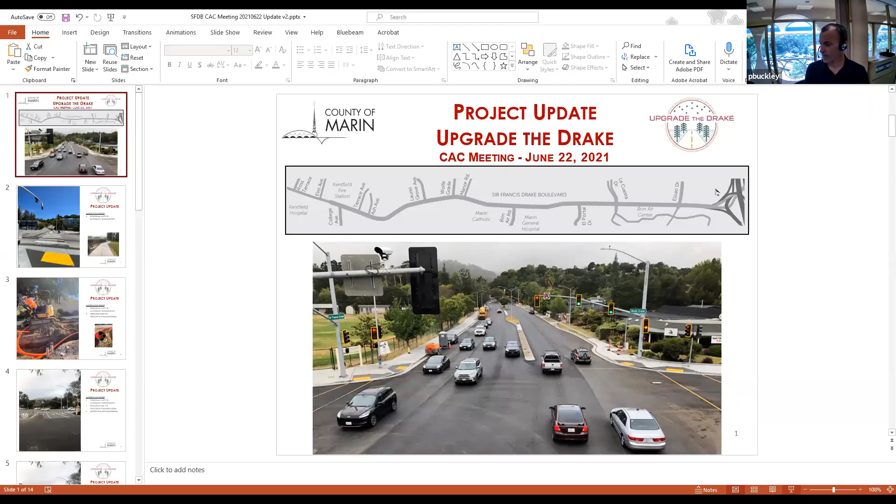Okay, thank you, Katie. As Katie said, I am just going to talk real briefly and update you on the progress, and talk a little bit about where we're at before we move into the lights.

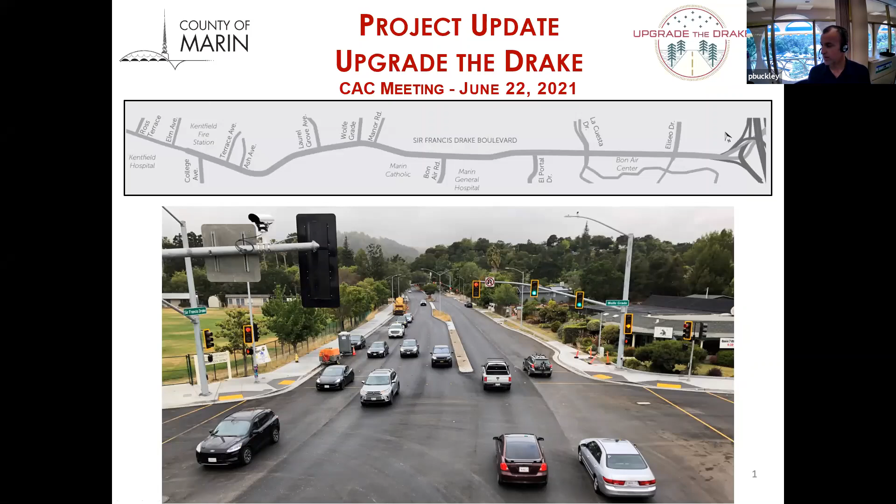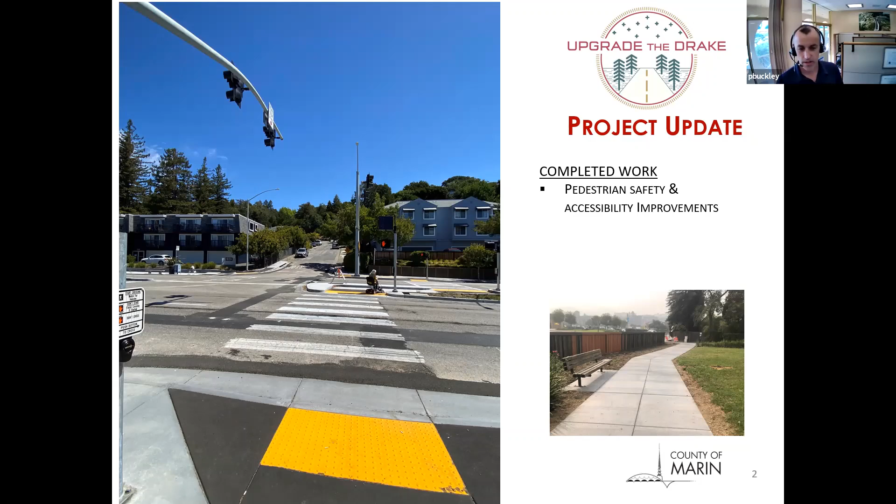Thank you for your patience with the noise, the paving, and all the disruptions this project has caused for many of you. We are getting very close to being done, so it's exciting, and I'm sure there's a sense of relief as well. Just to update on what's been completed: all of the pedestrian safety and accessibility improvements have been completed. This is the Ash Avenue Hawk signal here in this photograph.

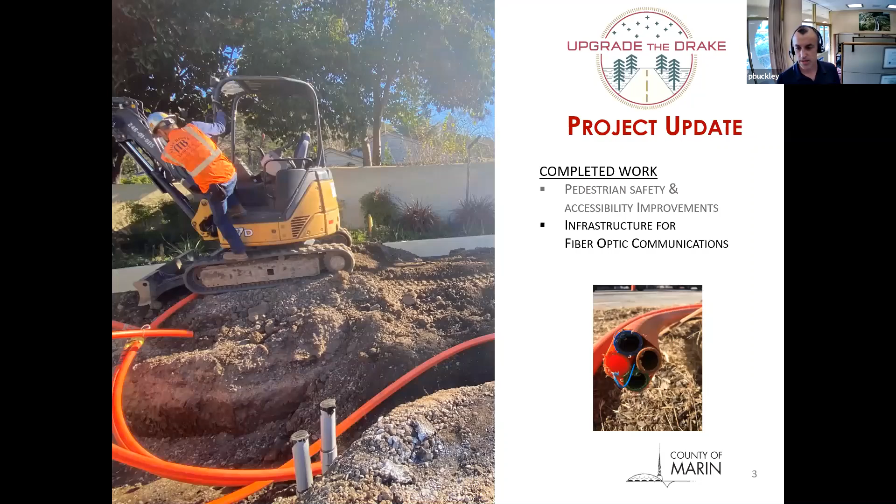All the infrastructure for fiber optic communications and the signal interconnect is all in place. The intersections have been reconfigured and improvements have been made at the intersections. At this intersection here, the pork chop islands have been removed.

Just today, we had a number of complaints about this intersection and how it was changed, with this middle lane configuration and the timing and phasing there. We went back to our designers at La Cuesta, and they approved us making the change to put the lane configuration with this middle lane being a combination through left turn lane. So we've re-implemented that today.

So all 8 signalized intersections, the pedestrian and safety improvements have been completed. We are still making a lot of changes with the timing and optimization. Just yesterday at Wolfe Grade, there was some timing adjustment. If you've driven along the corridor and come to a stop...

Philip, can you unmute yourself, please? Sorry, I messed up. Oh, I muted myself somehow. No, I didn't. Go ahead.

Okay, so we're still making timing and coordination improvements, and that's going to be an ongoing process as we test the system. The team will be making changes there. So appreciate your patience with how long it's taken to get our coordination into the system.

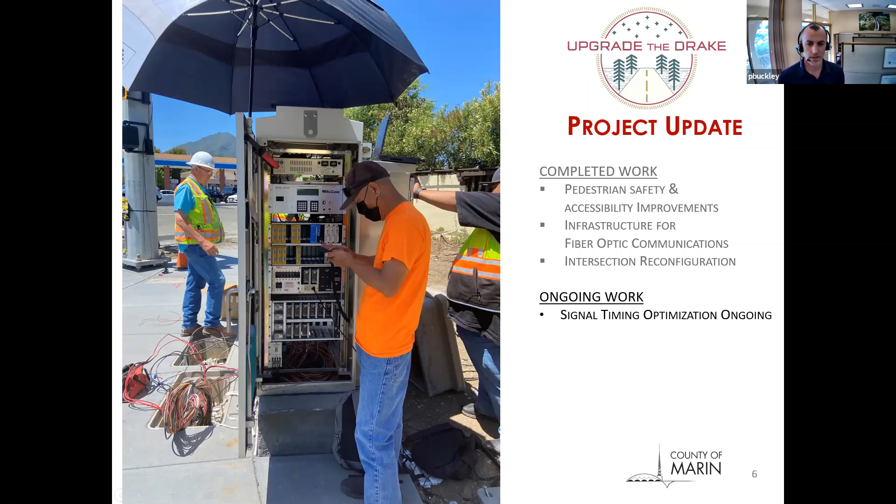So with the rest of the ongoing work that we're working on, we're finishing up some water line at Eliseo. I do want to emphasize how important the work is that we have completed with the water line. Throughout the course of the project, we've encountered a number of times when the pipeline, which was 70 years old in Sir Francis Drake, has had leaks, and we've had emergency repairs with MMWD. We're actually fixing some 70-year-old pipeline right now in Eliseo.

The good news is that the water line work and the night work looks to be completed at the end of next week.

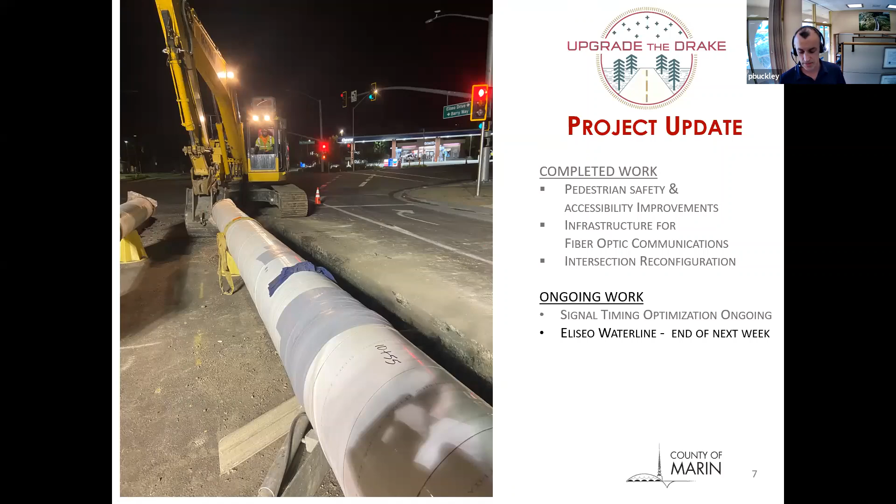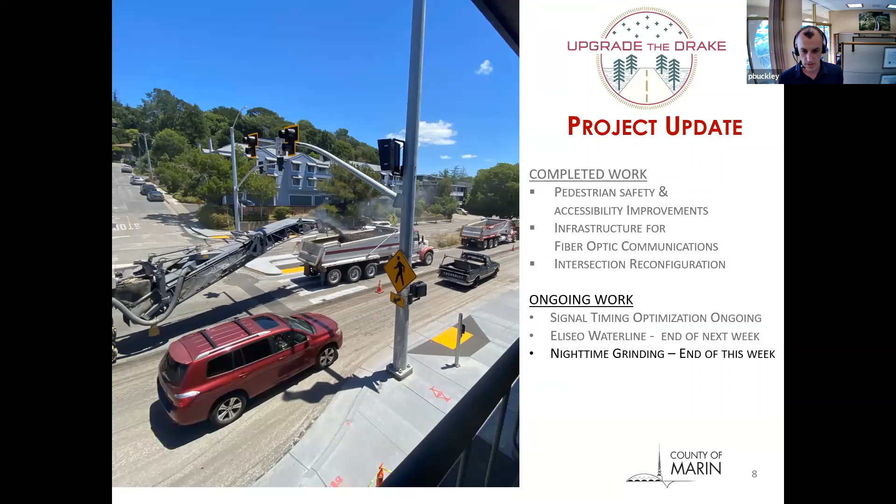The nighttime grinding is ending this week. The major grinding operation for our paving is ending, with tonight being the last night of that work. That's good news as far as the noise and equipment associated with the heavy grinding. We're working closer towards Highway 101 and the freeway, and there will be some closures tonight and next Wednesday for the on-ramps at the freeway.

So if you're getting on the freeway in the evening trying to head north or south, your route will be different, and it's definitely an inconvenience. We appreciate your patience, but we're getting very close, and next week should be the end of the major paving operations, with a final lift going on next week.

The week after next, there will be some manholes raised, some minor work. It will go quickly, but there will be some more night work after next week. The major equipment and major paving operations will be concluded at the end of next week.

I did want to talk a little bit before we get into the lights and turn this over. There have been comments about why we need more lights since there are fewer people driving at night, and why we need more lighting in the corridor.

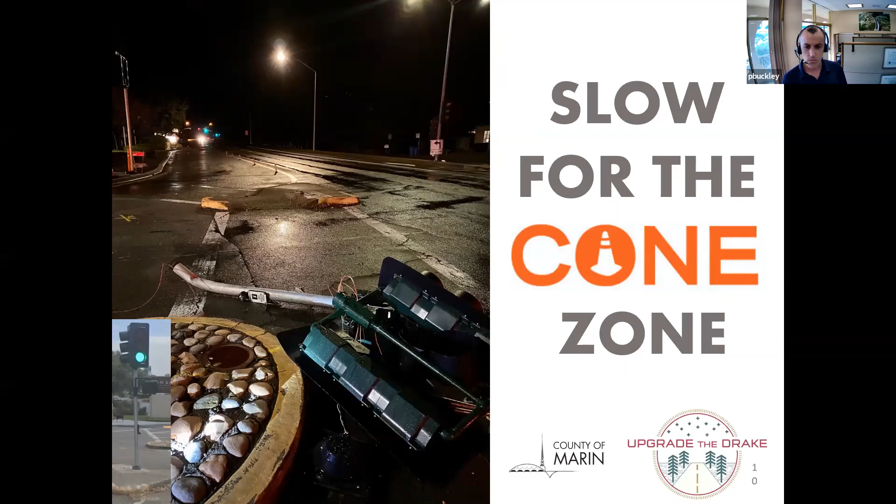Just to wrap up, we'll be finishing the majority of the paving next week, coming in with pavement striping, and then we're going to be talking about the street lighting tonight. I'm going to turn it over to Jeff and Ashley and their team, and then after street lighting we will be landscaping and taking care of the weeds, which have been a nuisance.

The landscaping work is being delayed, not just because of the drought. We are delaying the major planting within the project because of the drought, but we are looking to do some irrigation work at the completion of the street lighting. We need to make decisions about the street lighting and get it finalized and implemented before we move ahead with the landscaping.

One final topic is the traffic signal poles. What's pictured here are traffic signal poles, different from what Jeff and Ashley are going to talk about, which is the street light poles. These traffic signal poles were installed, and we got a lot of complaints and comments about their size and mass. They're a lot bigger than what we're accustomed to seeing.

It really is the new standard to have these larger poles. The standards have been updated, and as the county we're subject to using the latest design standards, and as a result we have larger poles.

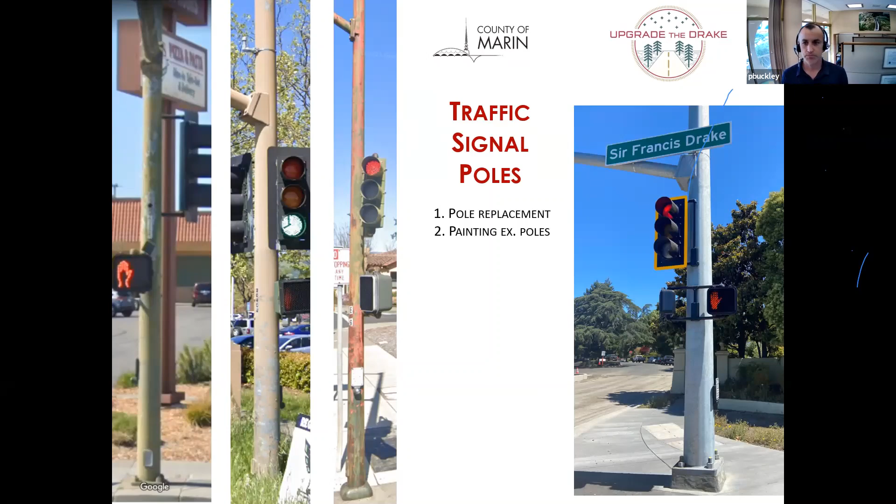With that, I'd like to turn it over to Jeff Rubendahl to talk about lighting. I'll stop sharing my screen here.

Thanks, Philip. Thanks everyone for allowing us to come in front of you today. We've been hard at work for the last few months, working with Philip and his team to come up with ideas and options to address concerns raised since the streetlight poles were installed and turned on. We're going to go through quite a bit of content, so we'll try to keep it comfortably paced and informative, but not dwell on it too much, so we have time for discussion.

We've broken it up into two sections. I'm going to turn it over to Ashley again to go through it to start, but we've broken it into two sections. The first is some basic lighting terminology, so that as we talk about what we're doing and what we see as opportunities, we can give you a sense of the lighting elements we're looking to modify as part of these improvements. Then we'll pivot to walk through the corridor from west to east and talk through options to address overlighting, light spilling into properties, and keeping light where it needs to be for safety reasons. So with that, I'll turn it over to Ashley.

But before I do, just a quick introduction. Fehr and Peers is helping the county with this project. We're a transportation consulting firm that specializes in transportation projects, including roadway safety lighting. Ashley, our project analyst, is one of our visual communications experts here in the Bay Area. I lead our engineering practice, and I'm also a San Rafael resident—I travel this corridor all the time, so I'm very familiar with the before, the middle, and hopefully the future of it. With that, I'll turn it over to you, Ashley.

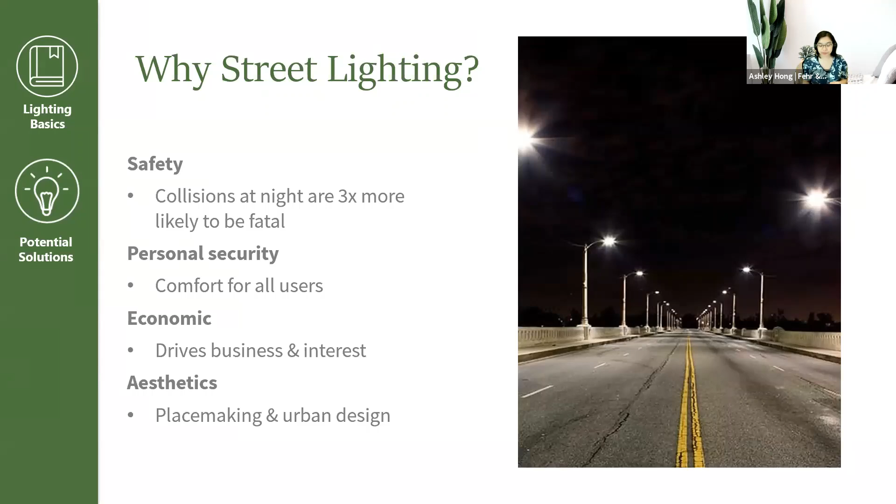With that in mind, I want to go through a couple of lighting basics, explaining a few terms to help you understand how we explain the proposed solutions. We'll use a lot of these terms later when we share our solutions, so I want to give everyone the chance to see the different elements that go into lighting analysis.

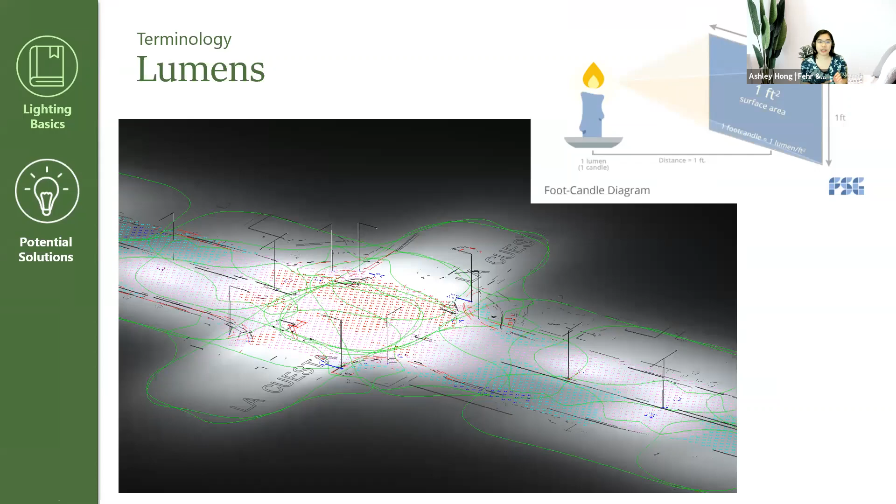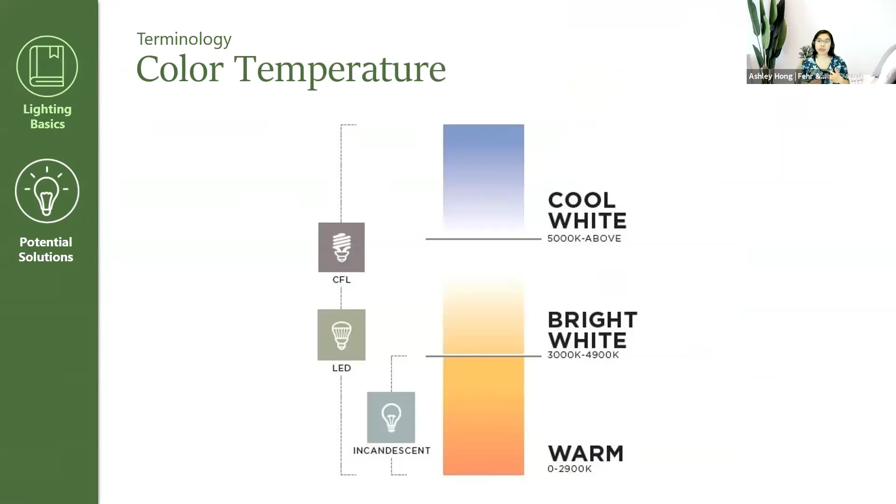The first terminology I want to introduce is lumens, which is how bright a particular light is. The unit of measurement is foot candles—fun fact, it's actually measured by how much a single candle lights one square foot of surface area. Color temperature is essentially how cool or warm the light looks and feels. Distribution is how the light is cast—essentially the shape of the light onto any surface.

Light pollution or light trespass is essentially any light that is going outside of what we want to be lit, kind of light that goes beyond the necessary things being lit.

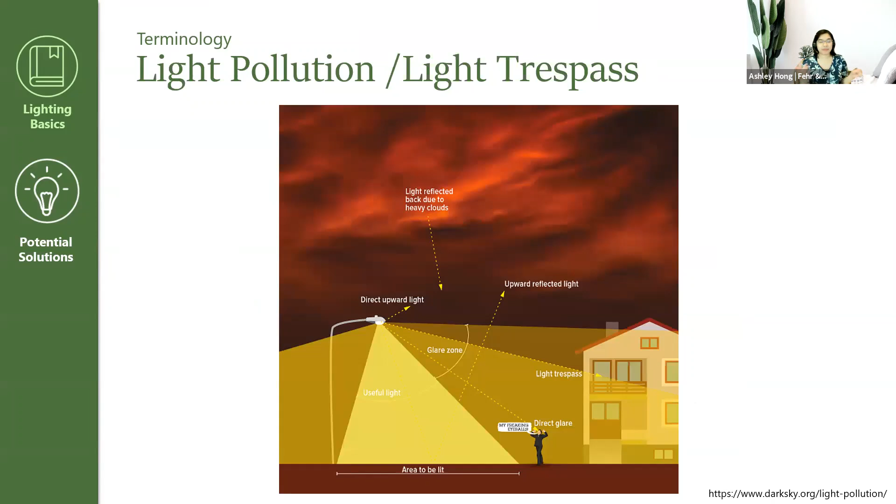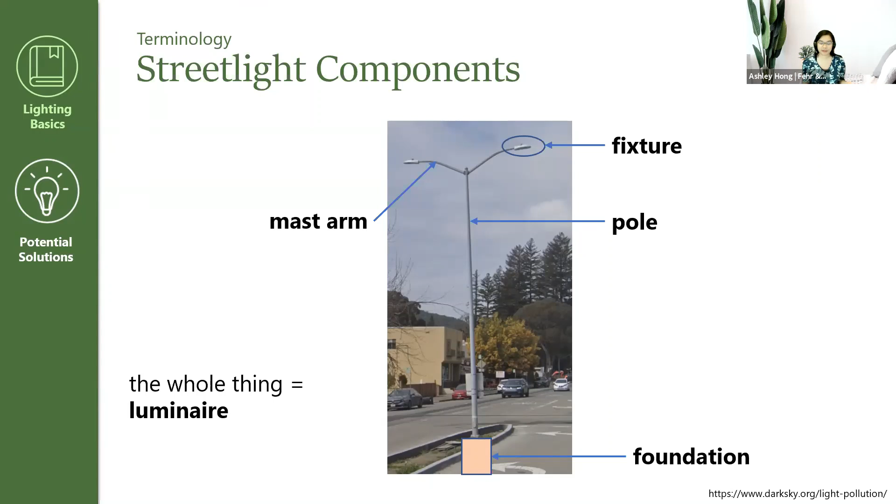Mounting height, going a little bit deeper into the nuances of this luminaire. The mounting height determines how tall the light is and where the light is casting. So lower mounting height is typically used for pedestrian areas such as sidewalks, plazas, parks. And a higher mounting height is typically used to light the roadway, to light the street itself and where vehicles are traveling.

Keeping all of that in mind, another thing we look at, and another piece that we can control and change, is the mast arm length. Essentially, the piece of metal that is attached to the long pole and attaches the fixture. That's something that we can control and change. So for example, if we shorten a mast arm from 12 feet to 6 feet, that's 6 feet less of metal up in the air. And keeping that in mind, the blue line shown on the screen is essentially understanding that where the light starts to be emitted from may be different from the height of the pole itself, depending on the design. So these are all different things we can take into consideration when designing streetlights.

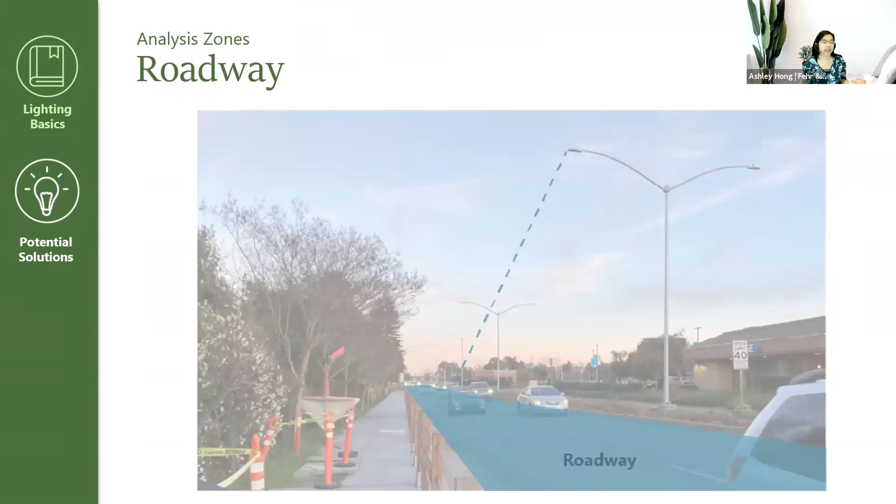So in order to analyze appropriate light levels, we isolate different zones. The first being the roadway, which has to be a certain brightness in order to allow moving vehicles to essentially see any conflicts, so we look at that in isolation. Then we look at sidewalks and paths separate from the roadway, and that needs to be lit enough for pedestrians to feel safe walking, but doesn't necessarily need to be as bright as the roadway.

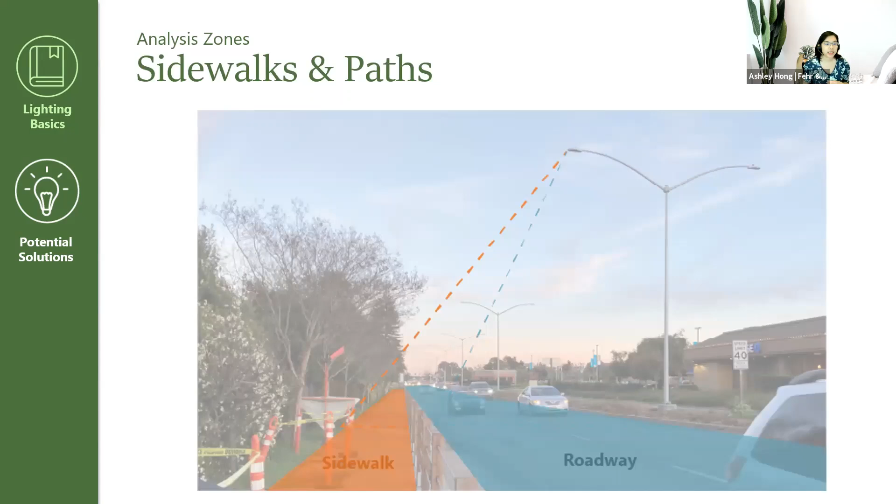Spillover is then what we look at. It's the light trespass beyond the roadway and the sidewalk, and we try to reduce this as much as possible. Finally, we look at intersections separately, which typically needs to be 2 times as bright as adjacent roadways due to the conflicts that can be expected in this area, such as pedestrians crossing and cars turning.

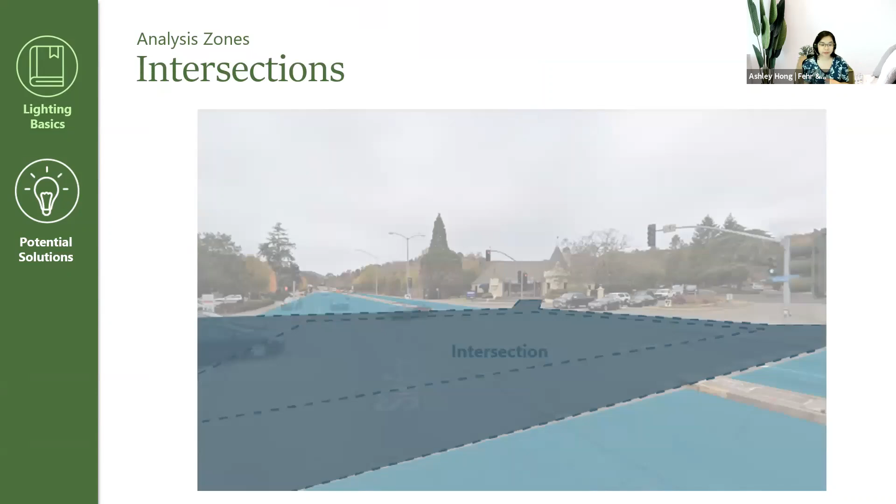Next, just want to get into some metrics and the engineering numbers behind everything we're looking at. This really guides our design and is considered best practice. So first, roadway classification. This is what is the function of the road, where does it go, how many vehicles use it on an average day.

Sir Francis Drake is a major roadway because of the average daily traffic and because it connects through multiple neighborhoods. And while we recognize that traffic on Sir Francis Drake is lower at night, a multitude of conditions still determines the need for certain levels of light, such as overcast and rainy days that can make the road appear darker even during the middle of the day.

So we also look at pedestrian conflict area, or essentially how many pedestrians can we be expecting on this road. And Sir Francis Drake is typically a low pedestrian zone. There's just not that many people walking around.

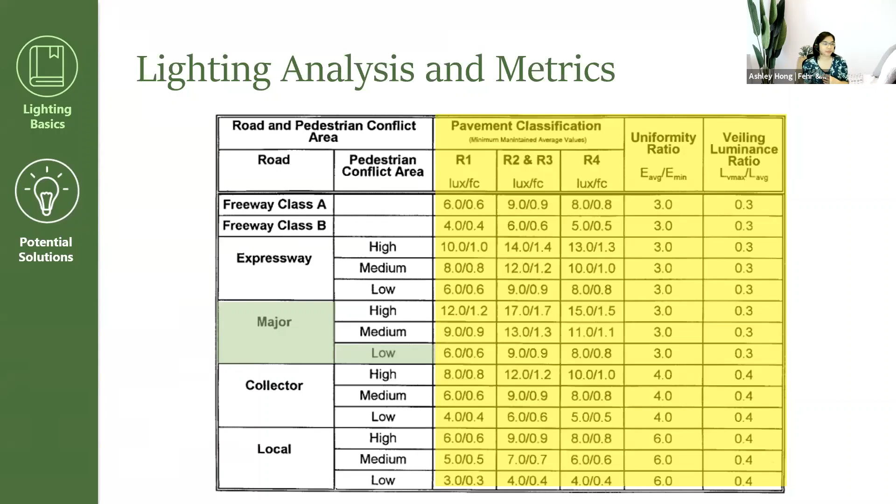Then we look at pavement classification, which is essentially the materials that the road is paved in, and takes into consideration any light that reflects off of a specific material. And then we look at uniformity, which is the distribution, how evenly distributed the light is along the roadway. We don't want spots that are too bright. We don't want spots that are too dark. So all of that said, these are all the different metrics that we take into consideration when designing best practices for street lighting.

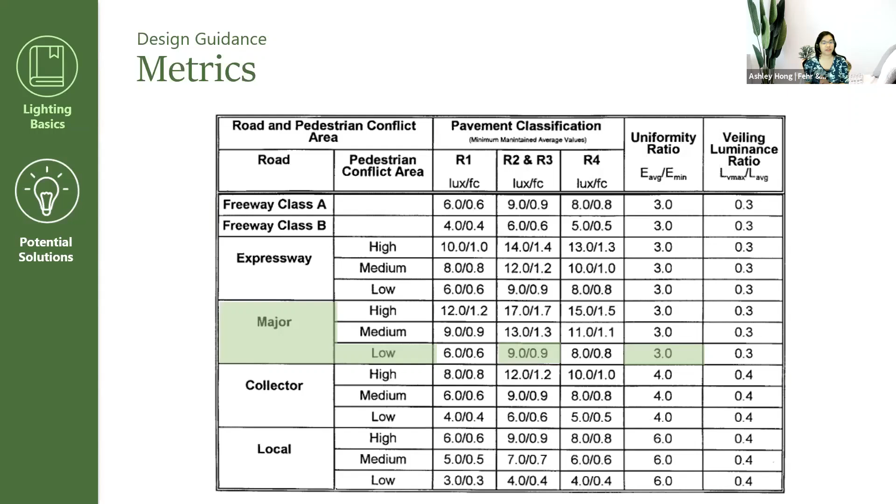And with all of those components in mind, I will turn it over to Geoff to present our proposed solutions. Thank you, Ashley. So that's the lighting 101, just to talk through some of the options and variables we looked at as we looked through the corridor. So we basically looked at what the conditions were before the project and designed with part of the project, and took a couple different perspectives on how to make some changes, understanding that some of the issues are related to the light trespass that Ashley described, the actual height of the poles themselves, and the aesthetics of them themselves. So what we're going to present here is some of the ideas that we've come up with.

There were a couple iterations and other options and ideas and types of fixtures we looked at, but we whittled it down to ones that are both feasible to address the issues we found on the corridor, but also have enough flexibility so it works throughout the whole corridor, where it's applicable, and works with the actual context of the corridor itself.

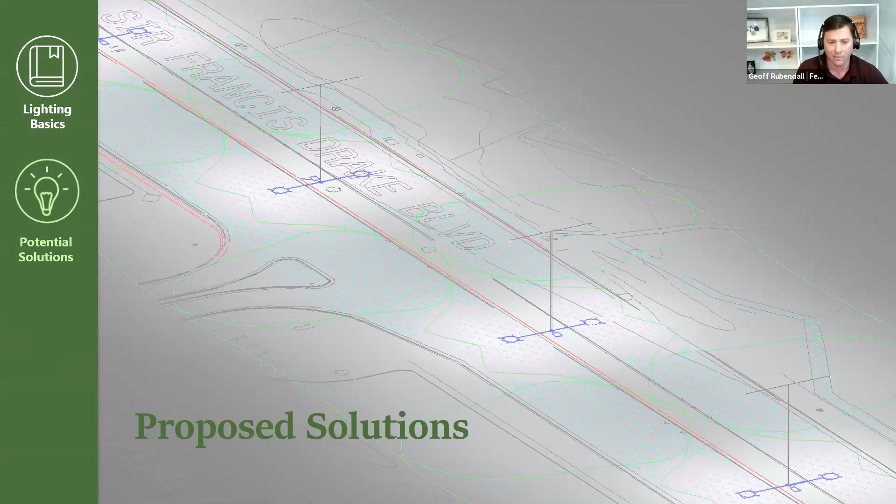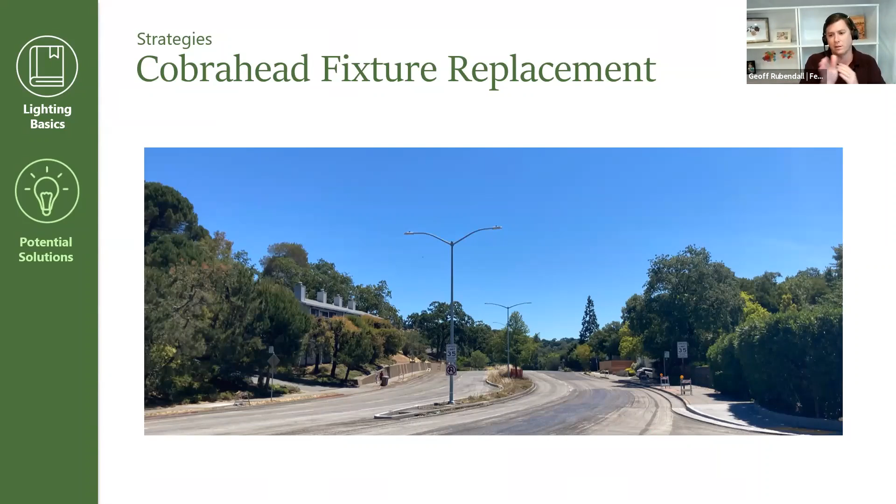So we can break our potential solutions into two different types. There's the Cobrahead fixture replacement, which is what you see here—these are existing from before the project, where the project replaced just the fixture, the little thing that emits the light at the top. We looked at changing those fixtures again to distribute the light differently.

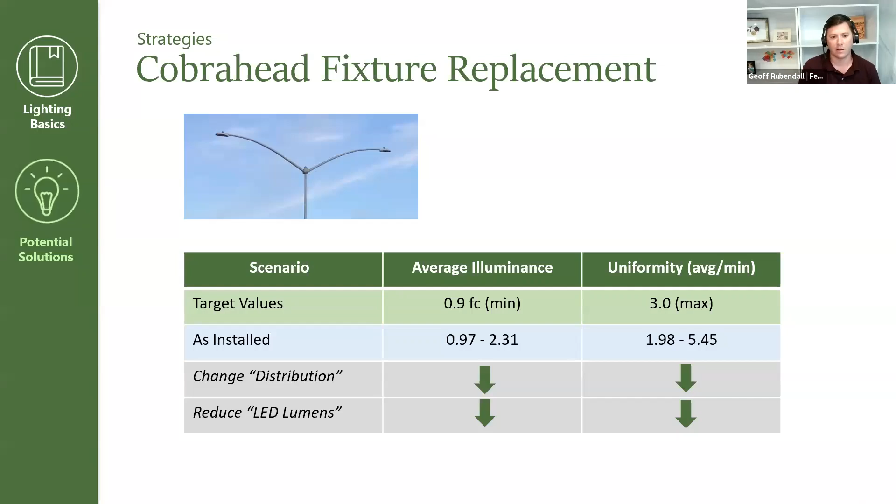So it doesn't cast as far back toward the property lines, and instead casts more longitudinally along the path of traffic. In daytime, the changes wouldn't look any different, but how the light is cast at night and how uniform it is would change. What we found is that by adjusting the fixtures, both the distribution and the brightness, we were able to achieve, with the same placement of the existing luminaires from before, considerable improvements to the issues of light casting beyond the roadway, while still maintaining the acceptable range for a roadway of this character and minimizing the concerns that had been raised.

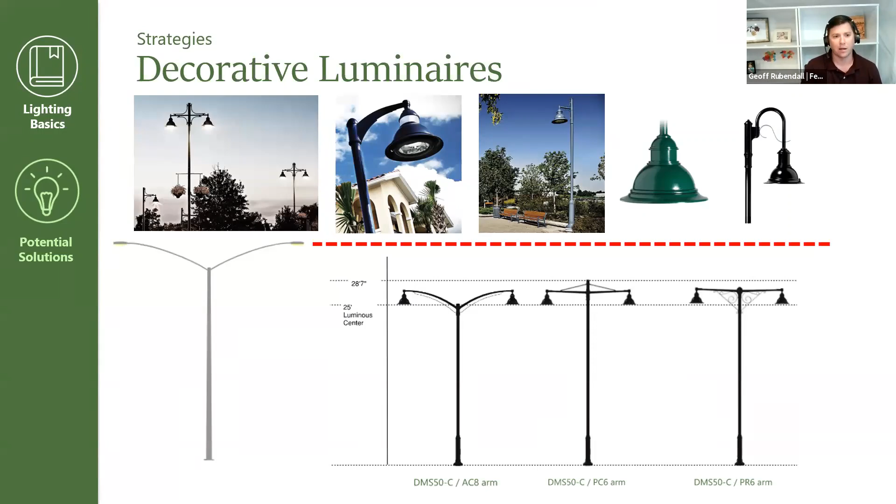We're going to walk through zones 1, 2, and 3 from west to east. We developed the zones somewhat arbitrarily, but with the purpose of understanding the nature of the roadway, the nature of the existing lights from before the project, and to break the larger corridor into sub-areas. It's not meant to be rigid, it's more to categorize conditions relating to lighting or the need for lighting changes.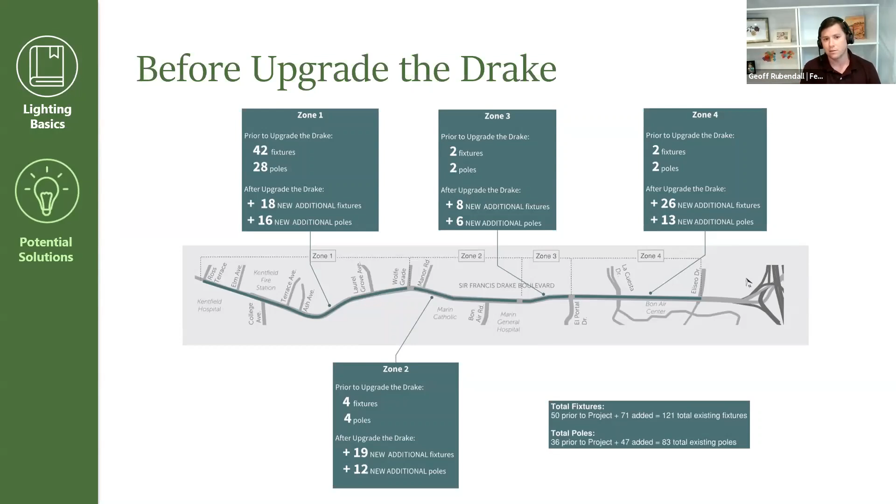This slide demonstrates where our potential solutions have the most applicability. Starting in zone 1, where the Cobraheads existed from before the project, there's quite a bit of improvement to lighting consistency and brightness just by replacing those fixtures. We don't have to rebuild new foundations for them, and we can light the roadway better than before—more context sensitive, not necessarily brighter, but more appropriate.

Zone 2, in front of the high school and the hospital, is where we have a couple different options, because there are existing old poles that remain, as well as some new poles. So we investigated both fixture replacement and decorative poles. We'll show you what that could look like, and we're investigating the results. The good news is that we were able to determine that in both scenarios—whether it's Cobrahead fixture replacement only, or decorative poles—they have the same lighting result.

The decorative poles, a bunch of new poles, does cost more, but for lighting the roadway and minimizing light trespass, we were able to find a way for both options to have a pretty good improvement. Zone 3 is where the roadway is a little more curvy. The existing poles are on the sides of the street, so there's only a single mast arm, and because of that, the decorative fixtures don't really cast light effectively all the way to the other side of the road where it needs to be lit, so decorative poles didn't seem as feasible an option there.

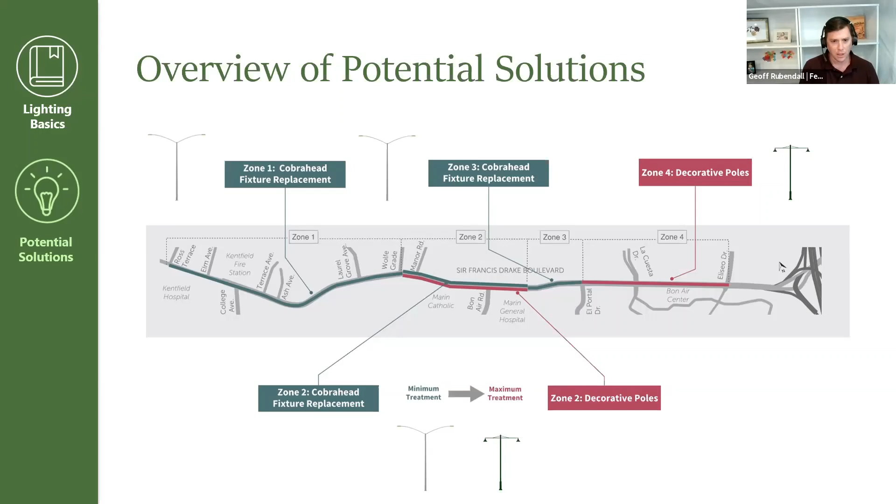But east of El Portal, where most if not all of the lights are new, we looked at an option to replace those with something more decorative. I'll walk through and show you what that's actually going to look like.

First zone 1, where this is a very simplistic rendering of really the difference is just how the light is cast. It's not going to cast as far wide into folks' backyards or beyond the property lines, but it's going to be as contained as we can make it into where we want to light it.

Next slide - I'll spend a little time on this since we have a lot of these images. This is a 3D rendering model of the corridor in zone 1 that the software we use can create. It isn't true to form - it doesn't show windows or front doors, but it's an approximation of the nature of it. There is a pretty big difference between the lighting shown on existing, what's installed today, and proposed, which is the Cobrahead fixture replacement.

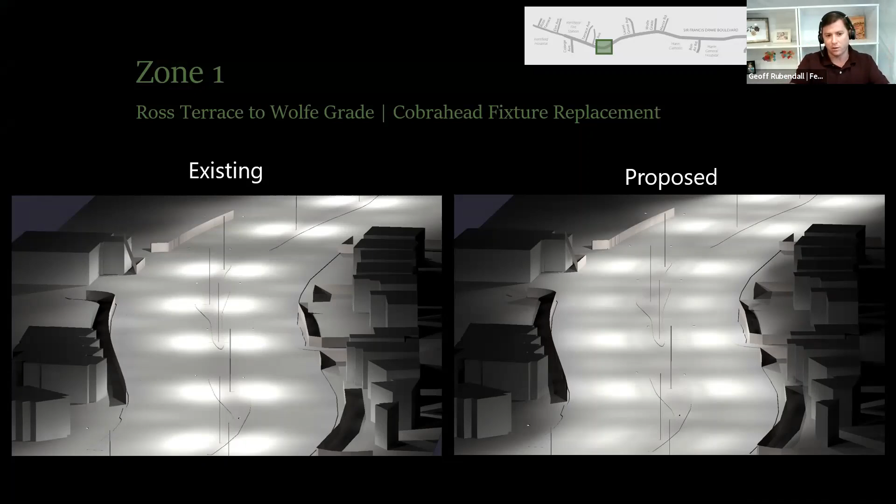It's a little nuanced if you look at it in black and white and grayscale. So on the next slide, by adding in a different color spectrum, we can really see how that fixture replacement would improve the conditions. I'll spend a little time on this.

It's a little bit of a magic eye poster, but work with me here - it actually does make sense. The brightness, the dark red, those are the hot spots - that's where really bright pavement is going to be. The existing condition with the lights on are really focused in the median, pointing down and overlapping with one another. That makes for extra brightness, so the uniformity is lacking.

In the existing, there's also quite a bit of cyan color outside of the roadway - cyan is light trespass for the most part. If you compare the amount of cyan on the left and the right, there's actually quite a bit less of the cyan on the right. You can see the vertical faces of the buildings where there's some greens on the existing, and those greens are taken to a minimum on the right.

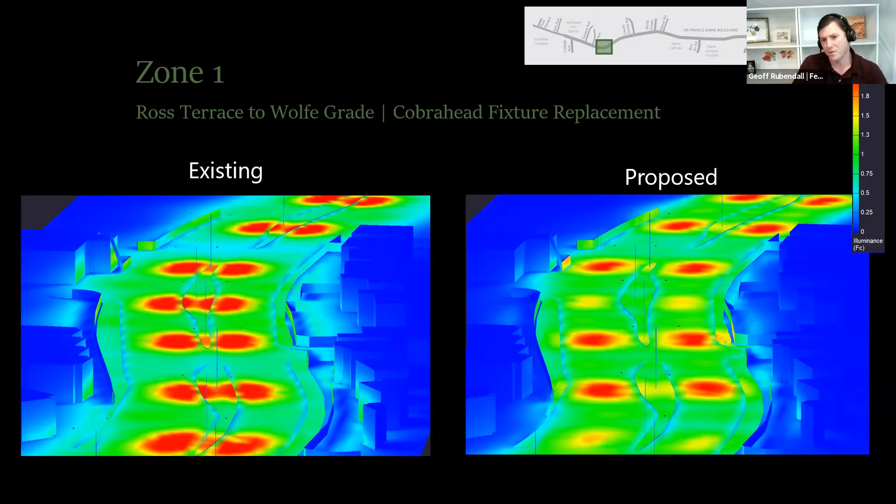We've got some numbers to show you what that actually means as well. Another rendering of the same one showing that in the existing condition, the lights are really casting up to the face of the buildings, and by changing the fixtures out, we really lessen the brightness and the trespass in that result.

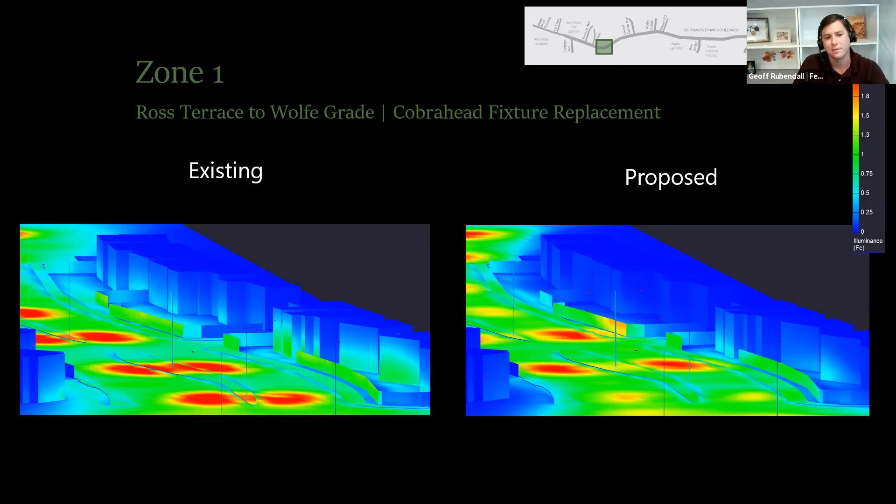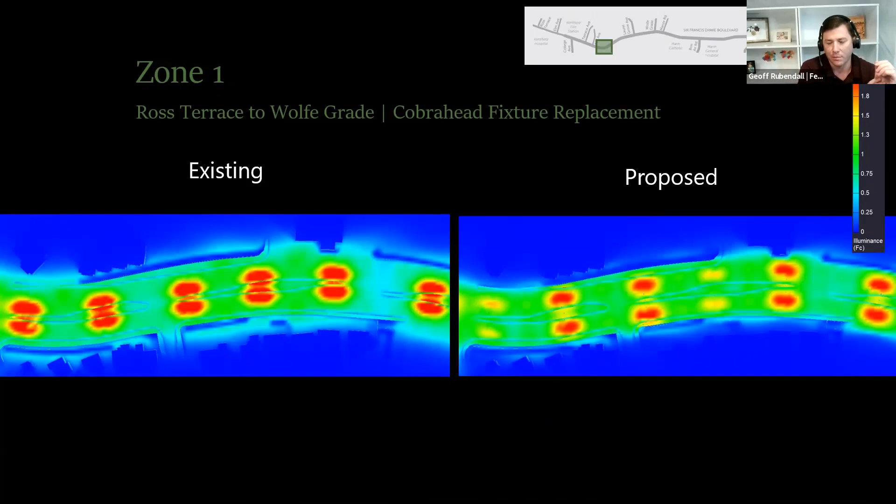This is one more bird's eye view of the same idea. What jumps out at me is the amount of cyan on the left - you can really see the amount of light that gets over the fences, whereas on the right, it's brought down to a minimum. You can see a little less of the edges of buildings and whatnot.

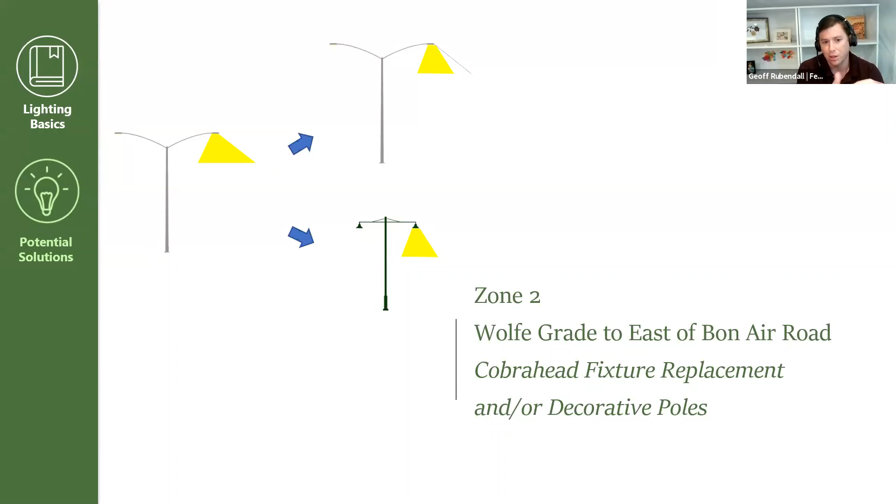So zone 2 is where things get a little different. We looked at both options - changing the fixture only, but also replacing all the poles out there with decorative ones.

As I was saying before, the results of whether it's a fixture replacement or decorative in terms of the lighting look very similar - the results are very similar. So we didn't do a visualization of the decorative ones for the proposed, but what we were able to do is really minimize the bright spots with a fixture replacement option.

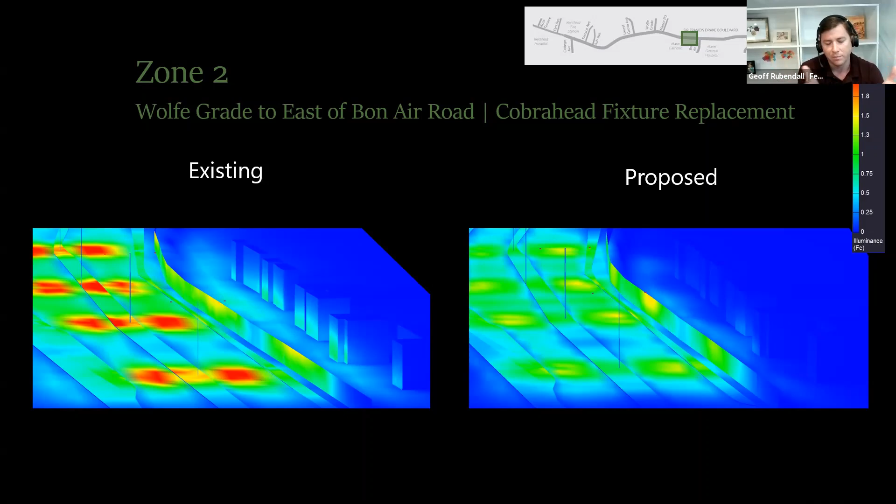What you see on this one is an approximation of the fence line in part of the corridor. What you can see is the fence is still going to have light cast on it, but beyond the fence and the buildings themselves have a much lower amount of spillover or light trespass by focusing the poles down and shortening the mast arms a few feet. Another bird's eye view shows that same sort of thing.

Less light on the building. So what does that mean? If we put in decorative poles, they're going to be shorter. The mast arms would be about 8 feet, whereas the ones out there today are 12 feet, so that's a 30%-ish reduction in mast arm length. They're also going to be about 8 feet shorter overall.

By doing that, in order to still maintain consistent uniform lighting along the corridor, the spacing of those decorative poles would need to be closer than the current Cobraheads. So one drawback of decorative poles is there would be a greater total number of lights, but they're much shorter and less obtrusive above.

For example, on this corridor, because the spacing would change with decorative poles, the pole would not actually be in that location anymore. It would move 25 to 50 feet depending on the corridor, but it would be a much shorter pole, much more consistent with the tree line condition.

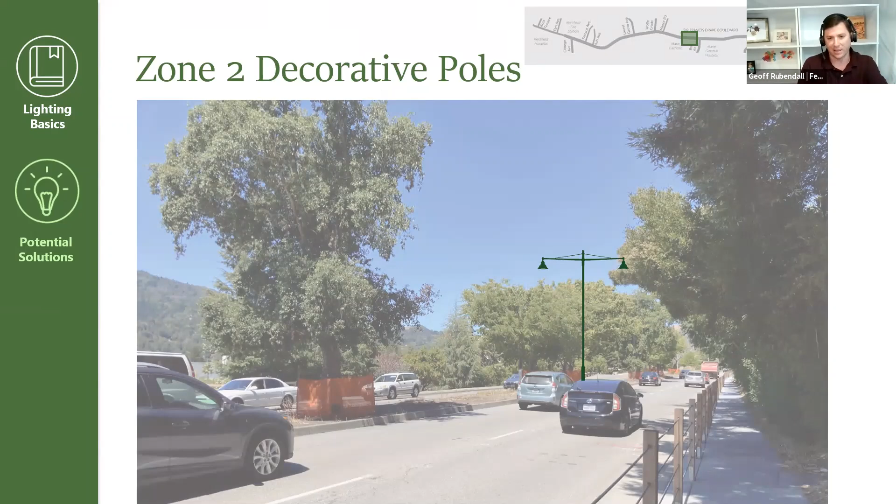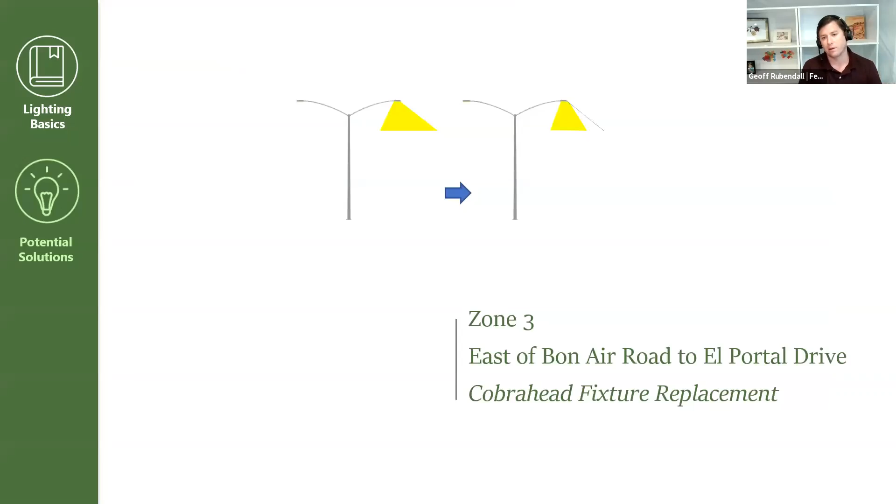Next page. Zone 3 is the curvier area where we have the luminaires on the side. We'll show you what the optics would look like. We were able to reduce those bright spots quite considerably while still maintaining a consistent amount of lighting to light the roadway through that curvy segment of the street.

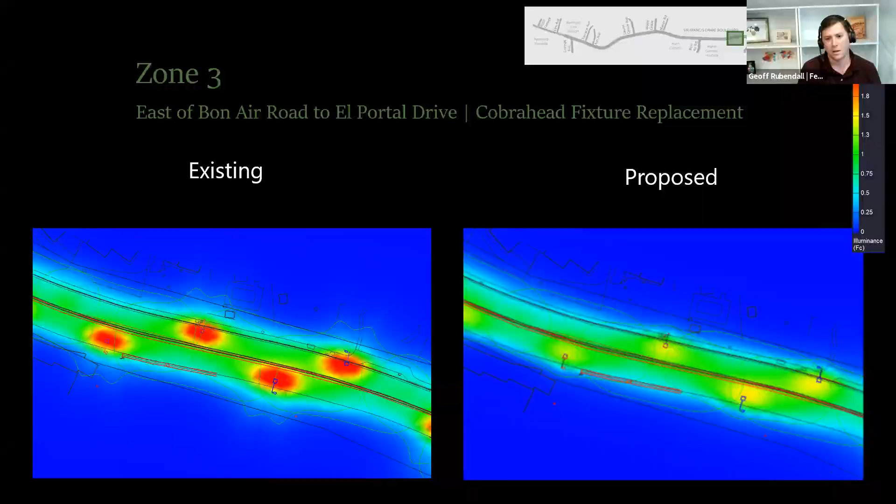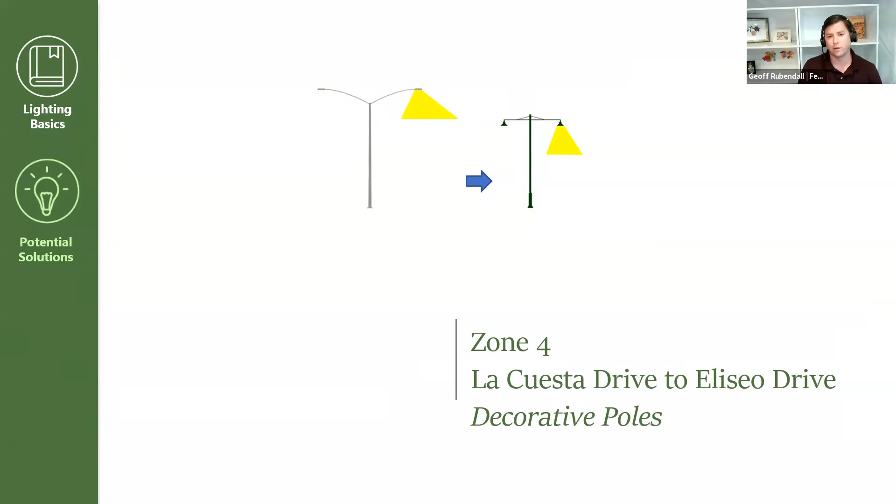La Cuesta and Eliseo is zone 4, where the long row of new Cobraheads were installed. One of the ways we came to this design aesthetic for decorative poles is that the mounting height and mast arm length were determined so we can reuse a lot of the foundations already installed. We didn't talk about it earlier, but a lighting system has underground conduits, pipes, and wires—all intended to be reused fully as part of any lighting changes. The foundations, if we change pole spacing, can't be moved; they're big pieces of concrete and will have to be demolished. But in this configuration, we were able to reuse about half of them.

So the ending result from a lighting standpoint is the bright spots are nearly eliminated, and consistency is maintained. Note the green line on the left that goes into the backyards—that's a contour line of brightness showing the relative amount of light trespass over those fence lines. On the right, there's still some light over the fence line, but it doesn't impact the adjacent houses as much. So it's a marked decrease in light trespass in this corridor as well.

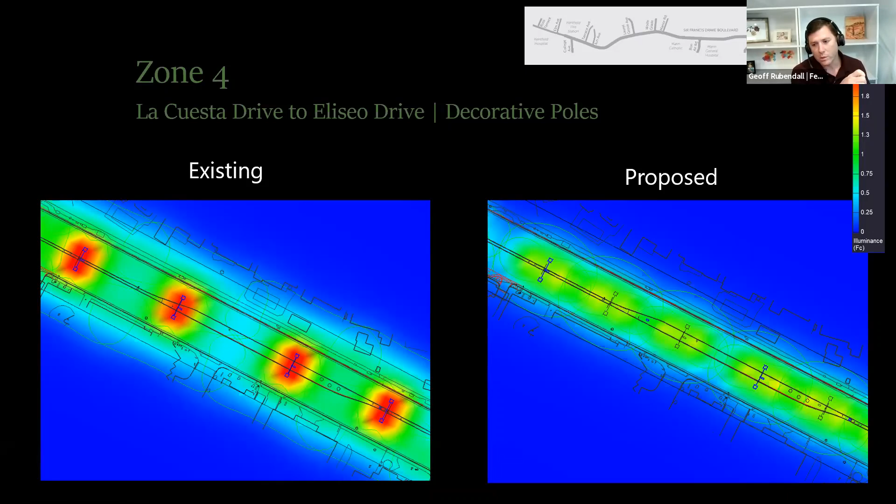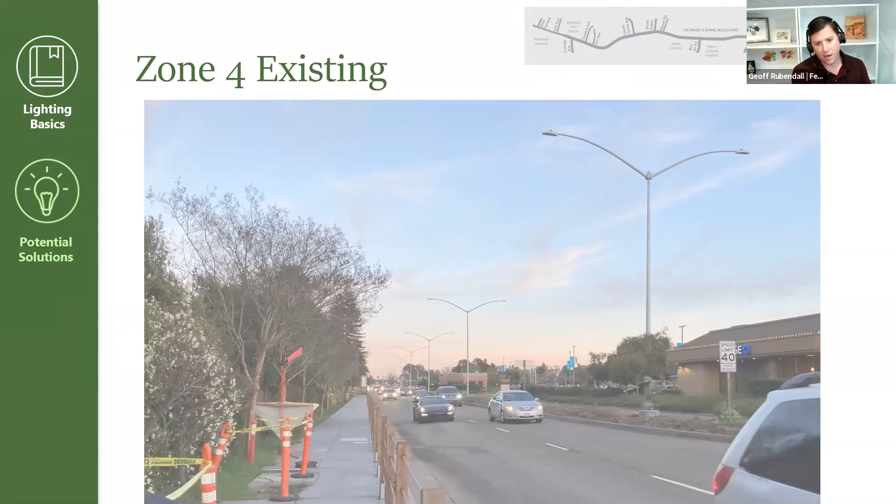This is what it looks like today—we all know what that looks like. With a decorative scheme with slightly different spacing, changing every other pole, we'd be much lower, and spacing would be about 100 feet instead of 150 feet. We'd have more poles, but not too many more—maybe 3 or 4 in this zone, and we have the numbers here as well.

One thing to note: during one of our investigations pretty early on, we did some visual view sheds of the actual parking lot lights in the Bon Air Center. Those lights are about the same height as the Cobraheads installed today. So if you're standing on the back of the sidewalk looking towards Mount Tam or towards those lights, these decorative lights are much less towering over that line of sight compared to the poles in the parking lot. That was one element we also took into consideration.

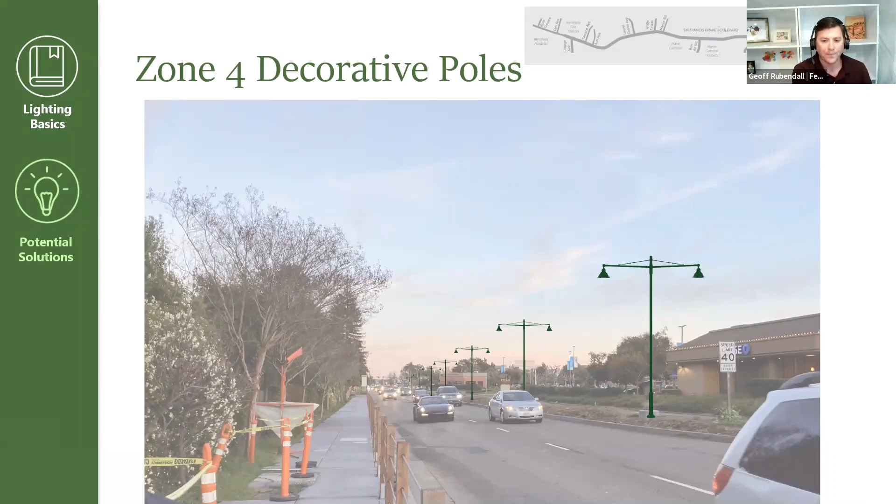Next slide. A lot of information thrown at you, and we're trying to keep this going so we have time to chat. But we saw the reduction in brightness and trespass, and we actually have a way to quantify that—each zone had a pretty sizable reduction in light trespass into adjacent houses and properties.

And this is also the number down in zone 2 between the Cobrahead fixture replacement option and the decorative pole option. Both of them had the same reduction in spillover to the adjacent properties, 35%.

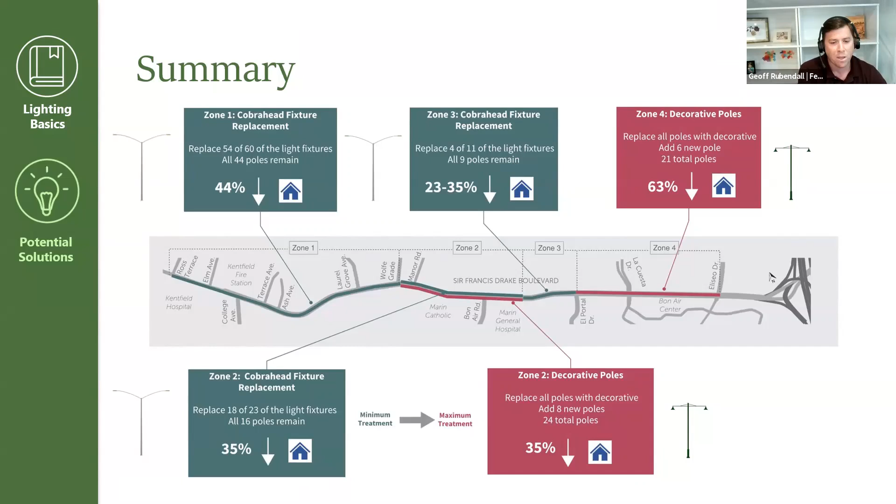So with that, that's the analysis we've done today. We feel it's addressing some of the concerns that have been raised. Wanted to go through what the anticipated next steps are.

We can talk through this as well, but just to understand that what we hear tonight and what we have been hearing, we're going to incorporate into whatever we do moving forward. We're going to refine the analysis and work with Philip and his team to really show what the models will tell us things would look like, and then we'll develop some cost estimates so we know what the level of investment is needed to execute the changes to the system or to the corridor.

And then we'll come back to the CAC and show them how things have changed, maybe give them some numbers in terms of total numbers of new lights and the costs, et cetera. Then we'll work towards finalizing the preferred alternative so that we can actually get construction documents put together so contractors can be solicited for bids to do this work.

And then just like any other project, there's a formal presentation of the design to the Board of Supervisors that will approve the design so that we can go to construction. I'm sure there's elements of that we can discuss as well.

So with that, I will kick it back to who's moderating the next. Going to be Eric Miller. Is that who's next? Yes. All right, Eric, are you there? It looks like you have to make him a co-host or something, he's not able to unmute himself. All right, let me find him. Meanwhile, Geoff, thank you very much. Thank you for the presentation, and Ashley as well. Eric should be able to unmute himself now.